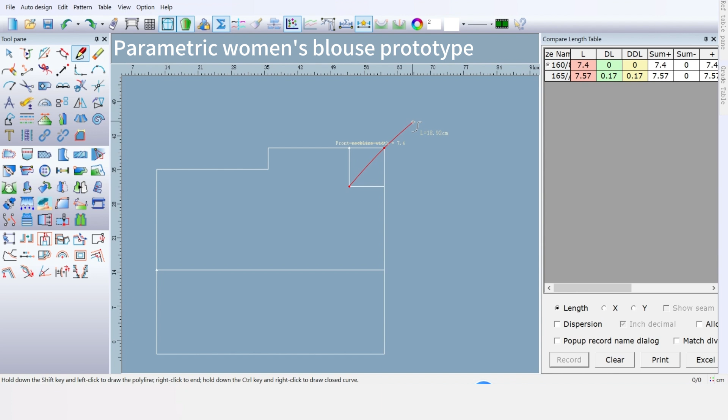Next, draw our front neckline arc. First, use the Intelligent Pen tool to connect two points. Then click the starting point. Then click any position on the lower half of the line. Select the proportion 1/3. Input the offset -0.5. Click OK. Then connect the endpoints and right-click.

Next, we locate the back neckline width position. Use the Intelligent Pen tool to click anywhere here. And input the length formula. Front neckline width plus 0.2. OK. Right-click to switch to the T-square tool. Draw downward, click anywhere. Input the formula, front neckline width plus 0.2 divided by 3. Click OK and connect the endpoints.

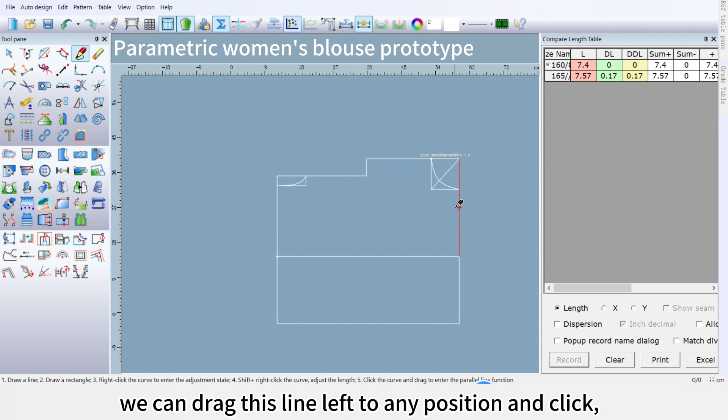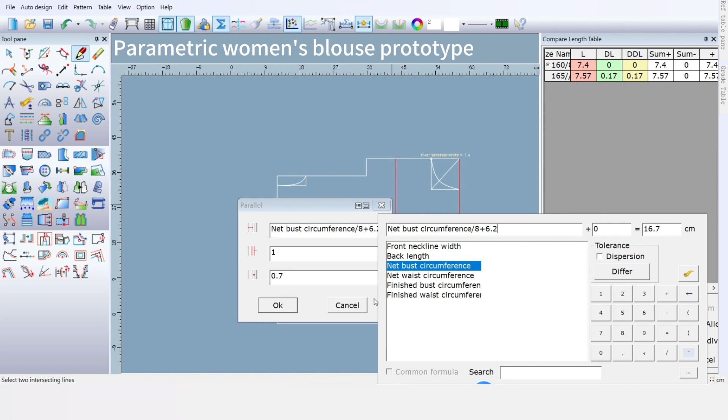Next, we locate the front and back shoulder width lines. We can drag this line left to any position and click. And enter our formula. Net bust divided by 8 plus 6.2. Okay.

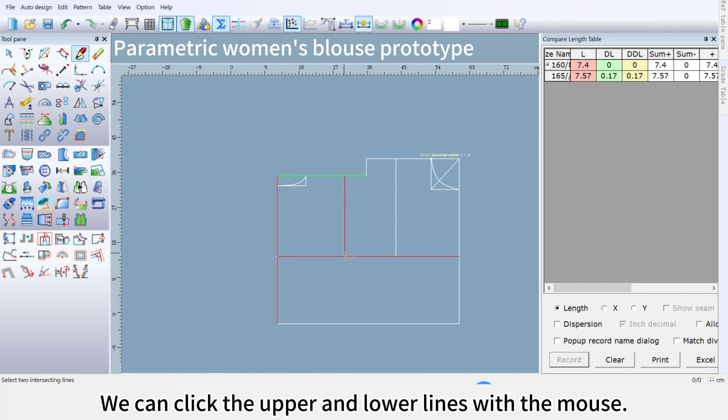Then draw the back shoulder width line and drag this line out. Now its length is too long. We can click the upper and lower lines with the mouse. When they turn green, we click anywhere. Enter our formula. Net bust divided by 8 plus 4.4. Click OK after finishing.

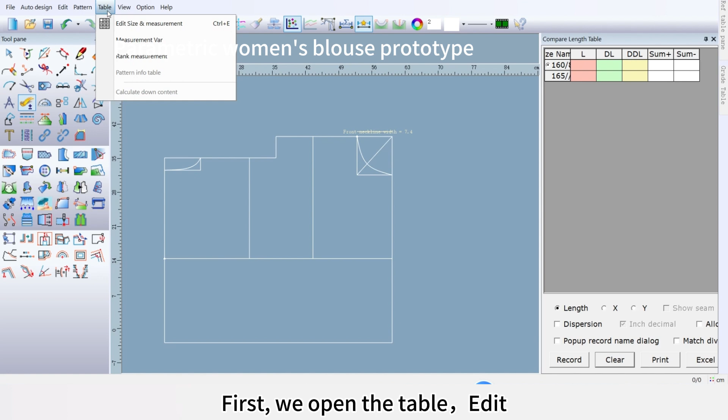Next, we draw the front and back shoulder slope lines. First, we open the table, Edit. Uncheck the length. Then input our front and back shoulder slope lengths.

Front shoulder slope 22 centimeters. Back shoulder slope 18 centimeters. Here we have two sizes, so we click the Intra-Group Size Difference button. OK.

Next, we use the Angle Line tool. Click the line and endpoint, drag out the line. Input the length 13 centimeters. Select the angle front shoulder slope angle. OK.

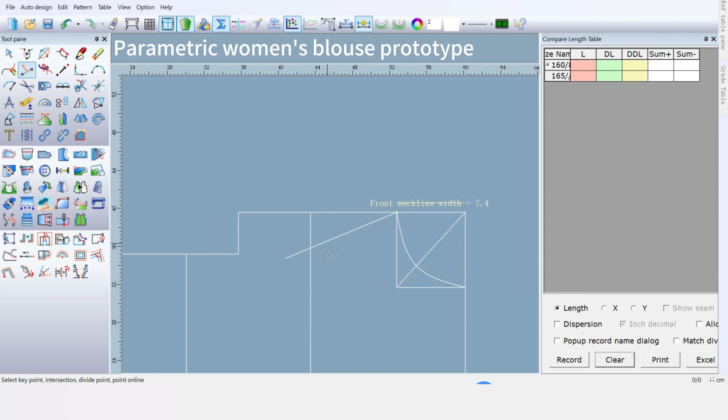Next, we use the point tool to click on the half segment line. Input its length 1.8 centimeters. Click OK. After that, use the Intelligent Pen tool to connect the endpoints. Right-click to switch to the T-square tool for connection.

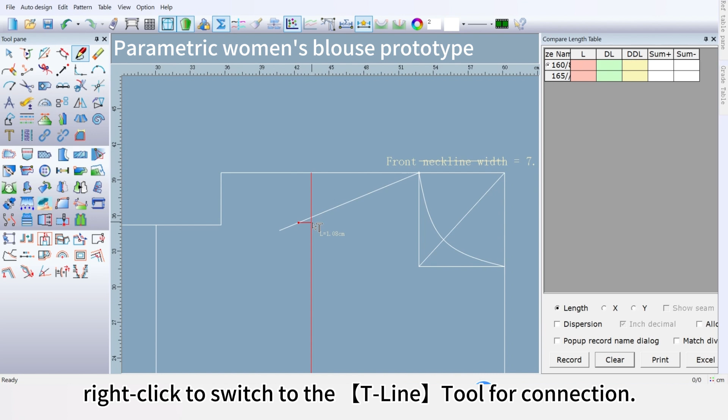Then use the Compare Length tool to connect the endpoint with the newly drawn point. Double-click it. After the segment turns green, click Record. Then we open the table, the measurement var. Change its name to Front Shoulder. Click OK.

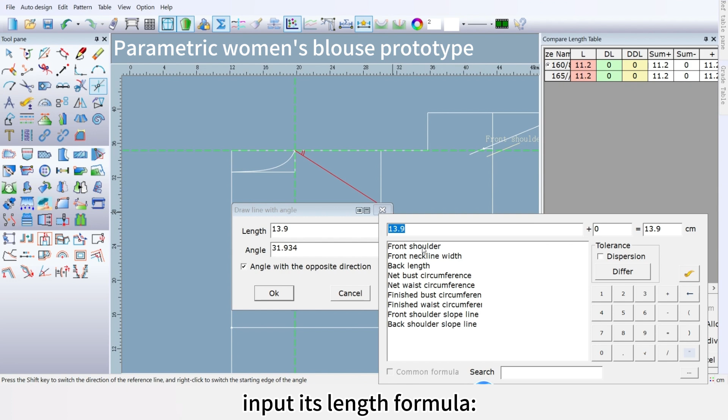Next, we draw the back shoulder slope line. Use the Angle Line tool to click the line and endpoint. Right-click to switch its angle. Then drag it out and click anywhere. Input its length formula: front shoulder plus net bust divided by 32 minus 1.2. Select the angle back shoulder slope line. OK.

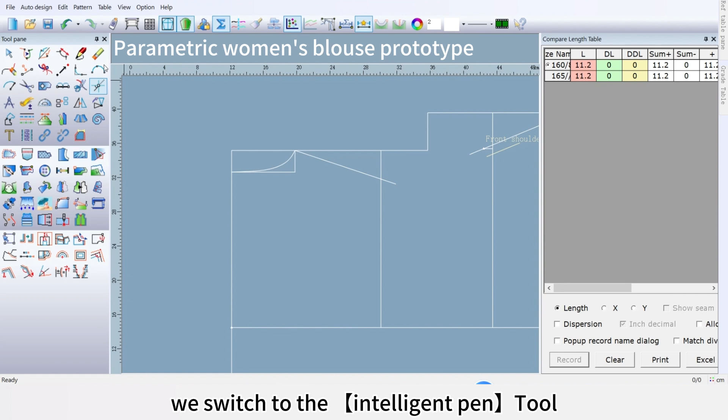We switch to the Intelligent Pen tool. Right-click this point to switch to a T-line. Connect it here. Next, we use the Point tool to locate 8 centimeters below this point. Now we can see our reference point is here. We can press the shortcut key F9 on the keyboard to switch the reference point position. Then click on this line. Enter our distance 8. OK.

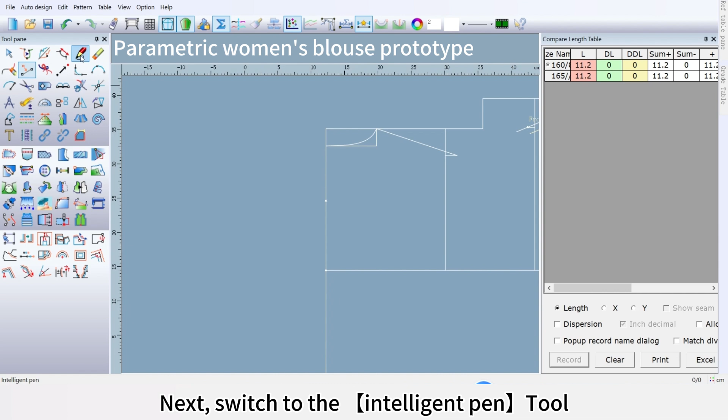Next, switch to the Intelligent Pen tool. Horizontally connect this point to the side. Right-click to switch to the T-square tool to complete the connection. Next, we use the divider tool to divide the segment into 2 equal parts. Here we can click the relative number on the keyboard. Here we can click the number 2. We continue to use the divider tool to bisect another segment. Click it.

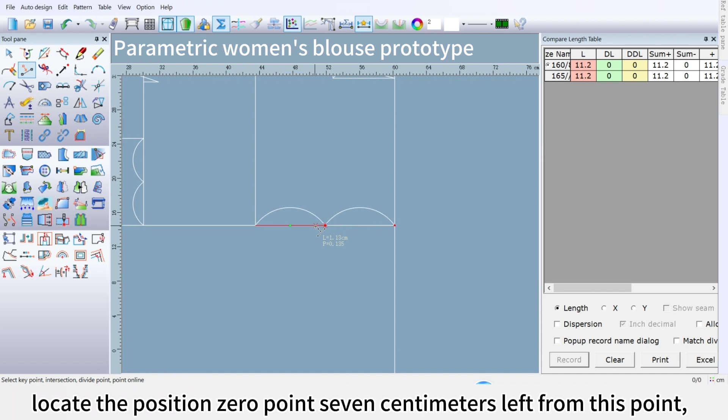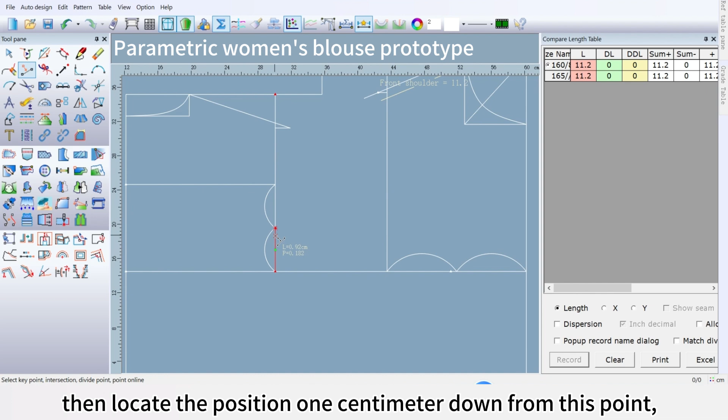Next, we switch to the point tool. Locate the position 0.7 centimeters left from this point. We first click the segment and input negative 0.7 centimeters. Click OK. Then locate the position 1 centimeter down from this point. Click the segment and input negative 1 centimeter. OK. Then we want to find the position of this point. We click it. Input the formula net bust divided by 32. OK.

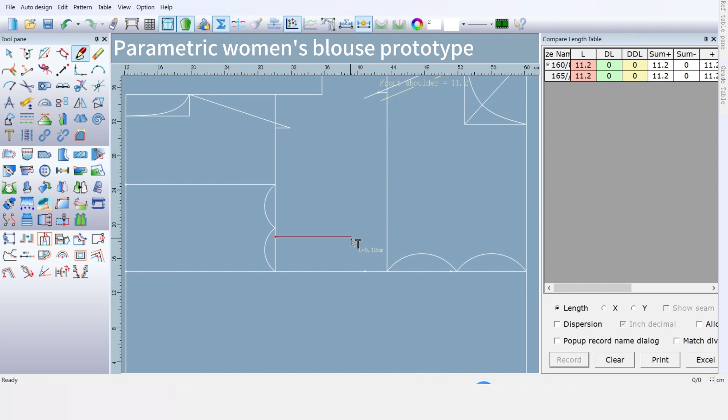Next, we use the Intelligent Pen tool. Draw a horizontal line from this point, and draw a vertical line from this point. Then select both lines. Right-click on the inside. Then connect the right angle vertex to the target point. Right-click the mouse.

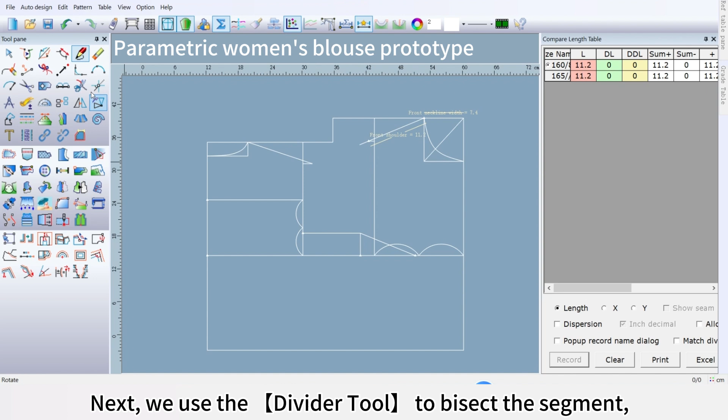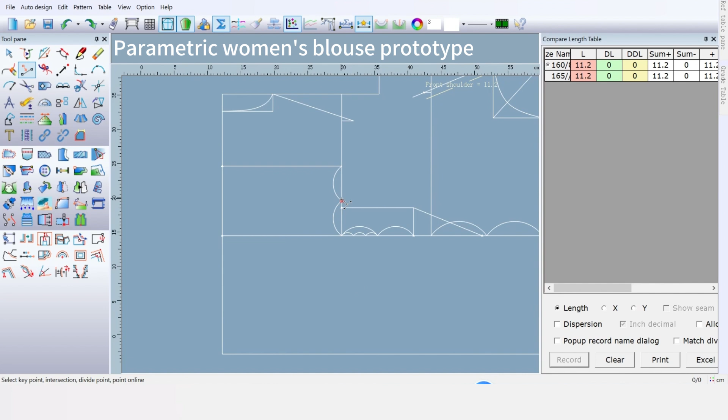Next, we use the divider tool to bisect the segment, and divide another segment into 3 equal parts. Click the number 3 on the keyboard and click it. Then we use the point tool to locate the position 1 centimeter left from this point. We put the point tool on this point and press Enter. Input the x-axis offset negative 1 centimeter. OK.

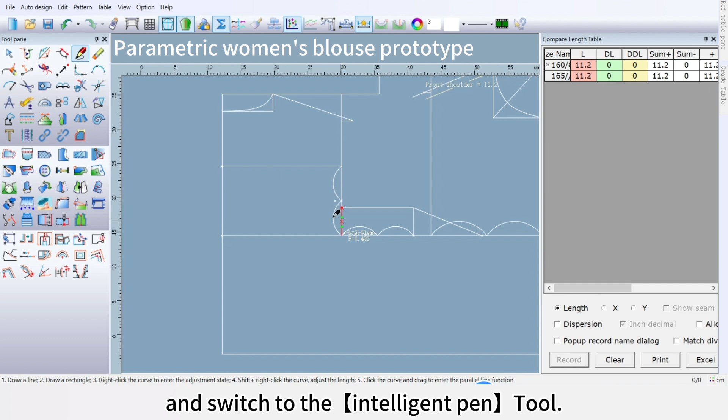Then right-click the blank area with the mouse and switch to the Intelligent Pen tool. Click this point. Right-click to switch to the T-square tool and connect it here. Connect the midpoint to the upper and lower endpoints. Connect this point downward.

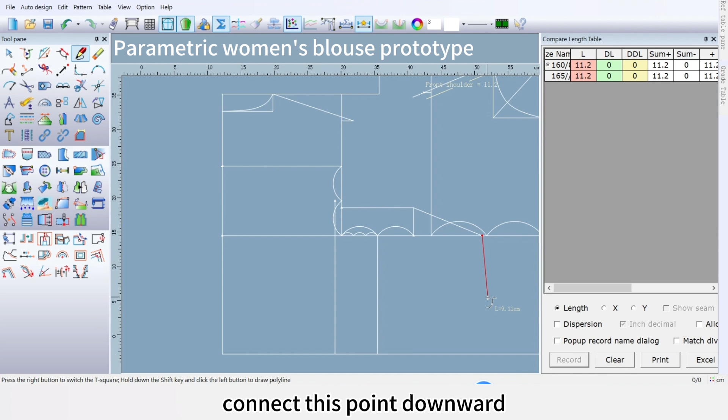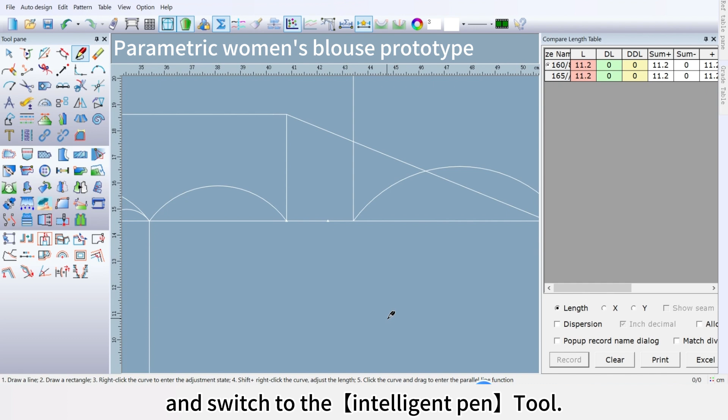Then we use the point tool to locate the position 1 centimeter left from this point. First, click anywhere on the line and input negative 1. Right-click the blank area and switch to the Intelligent Pen tool. Vertically connect this point downward and then upward.

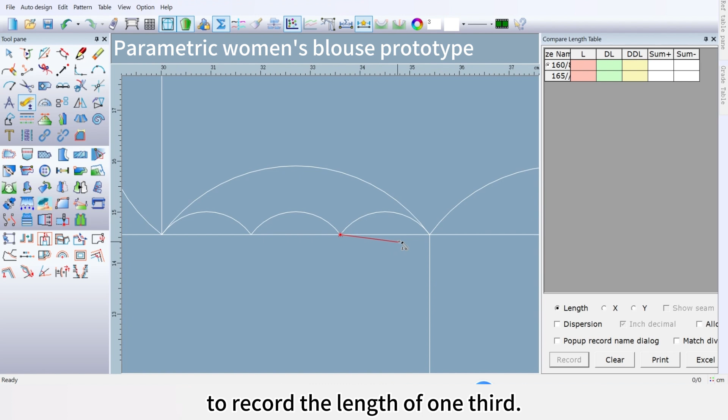Use the Compare Length tool to record the length of 1/3. Double-click it to turn green and click Record. In the table, the measurement var, change its name to Underarm Hollow Curve. OK.

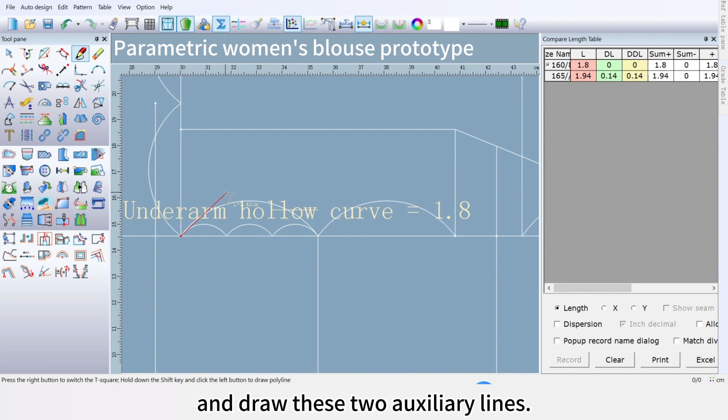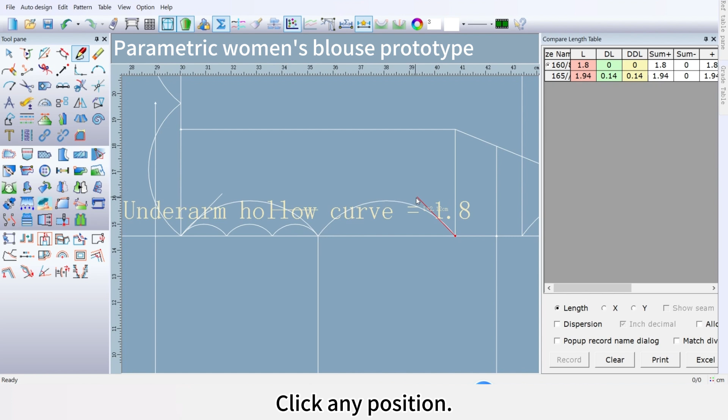Next, right-click to switch to the Intelligent Pen tool and draw these two auxiliary lines. Click this point. Right-click to switch to the T-square tool. Input the formula, underarm hollow curve plus 0.5 centimeters. OK. Click on this side as well. Right-click to switch to the T-square tool. Click any position. Underarm hollow curve plus 0.5 centimeters. OK.

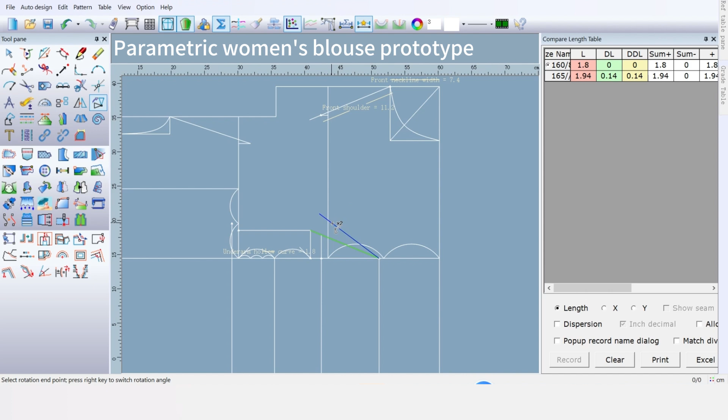Next, we use the Rotate tool. Click on this line. Right-click, click the center point, and select the line we want to rotate. After it turns green, we move the mouse. Click anywhere. Input our formula: finished bust size minus 4.5.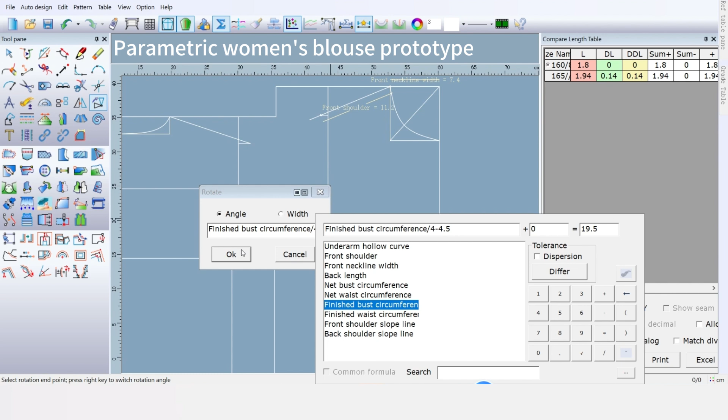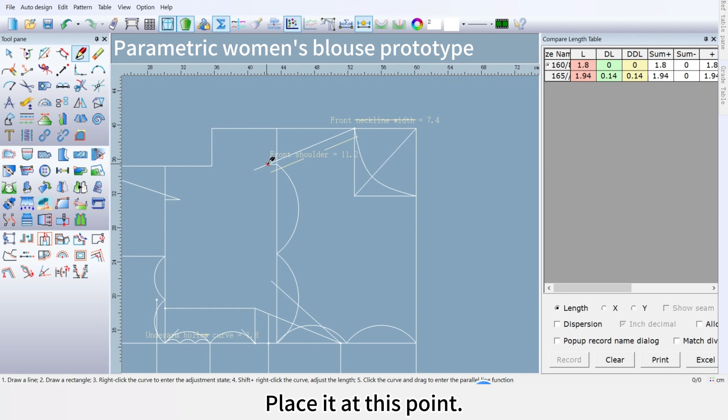OK. Next, we draw the armhole line. First, we use the divider tool. Drag from this point to that point to find its midpoint. Then use the Intelligent Pen tool. Place it at this point. Double-click Enter. Place it at the 1/2 point. Double-click Enter.

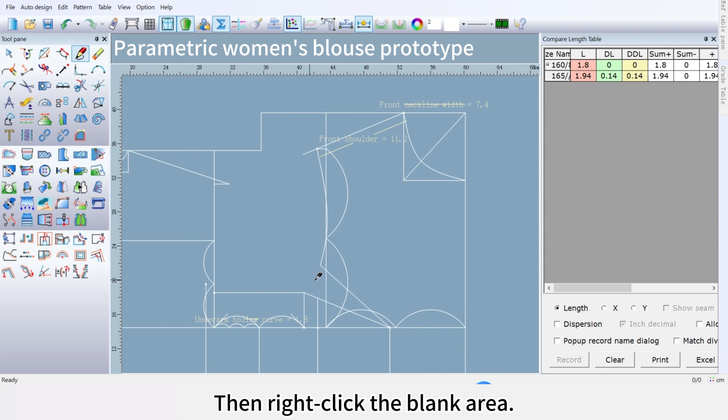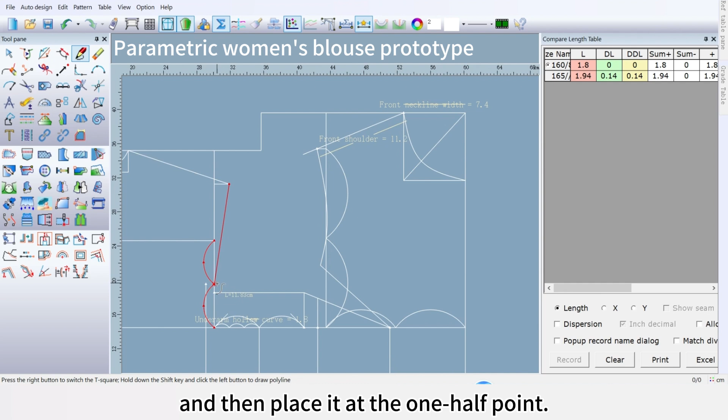And place it at this point. Double-click Enter. Then right-click the blank area. Then place the Intelligent Pen on this point. Double-click Enter. And then place it at the 1/2 point. Double-click Enter. Then place it at the auxiliary line position we just found. Double-click Enter.

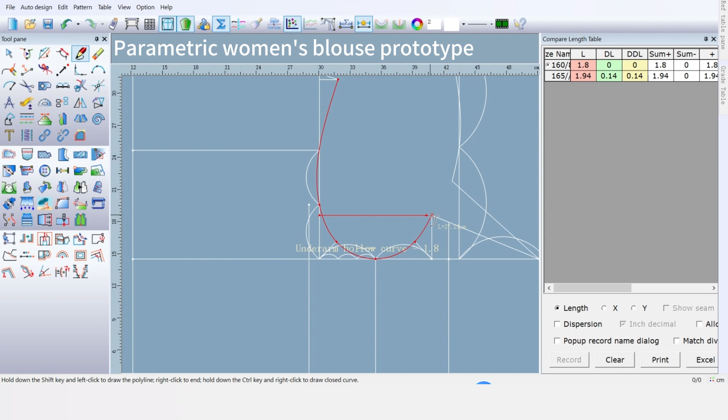Place it at this point again. Double-click Enter. And place it at this point. Double-click Enter. And place it at this point. Double-click Enter. Then right-click the blank area.

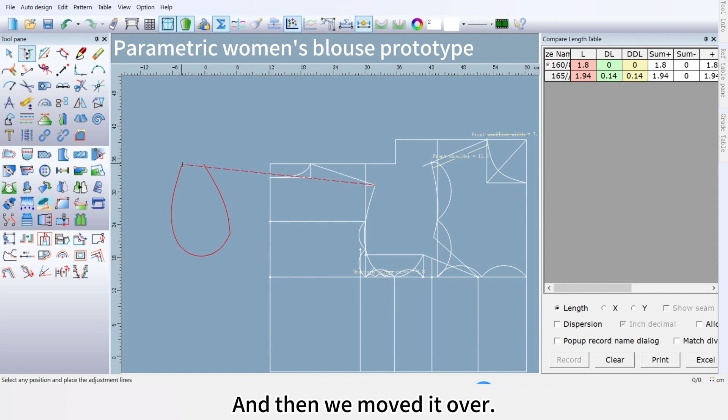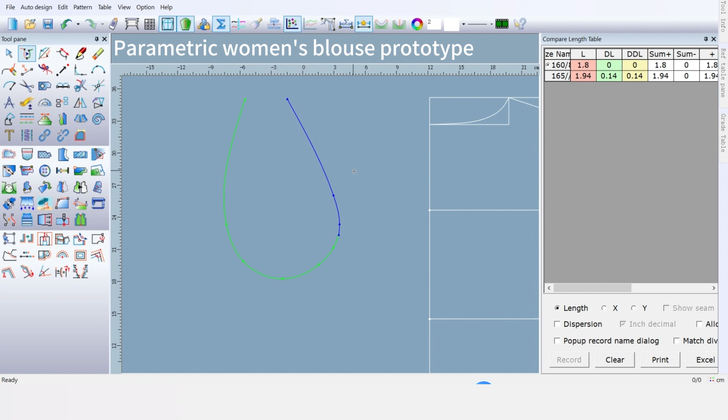Next, we use the Move and Rotate Adjust tool. Select the two arcs we just drew. Right-click the blank area and select these two lines. Right-click the blank area, and then we move it over. Click on the point on the line and adjust the arc. After adjustment, right-click the blank area.

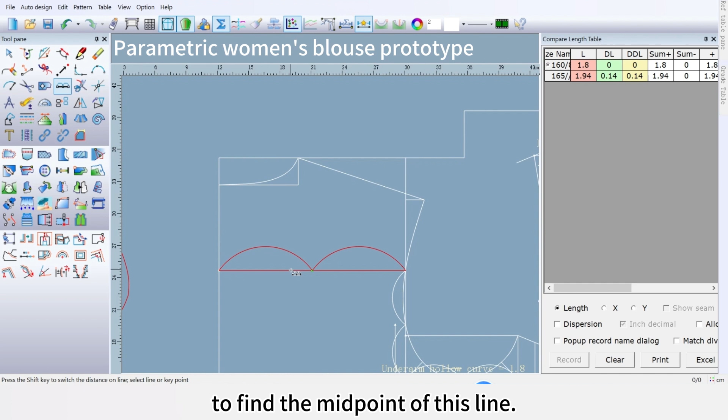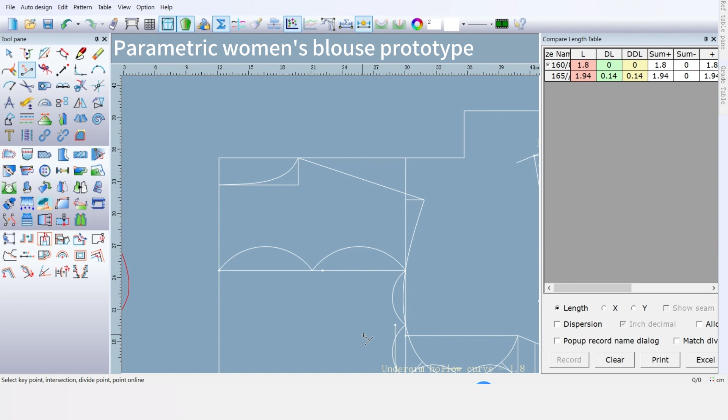Next, we draw the dart. We use the divider tool to find the midpoint of this line. Then use the point tool. Find the center point and offset it 1 centimeter to the right. Here we press the shortcut key F9 to switch the reference point and click it. Right-click the blank area. Switch to the Intelligent Pen tool. Connect vertically upward from this point.

Then use the point tool. Find this point and move it 1.5 units. We click and enter 1.5. And click the point we just found. And left-click anywhere on the line. Input the formula: net bust divided by 32 minus 1.2. OK.

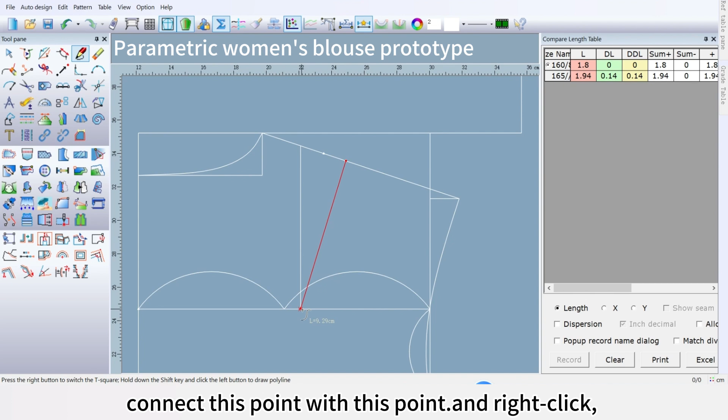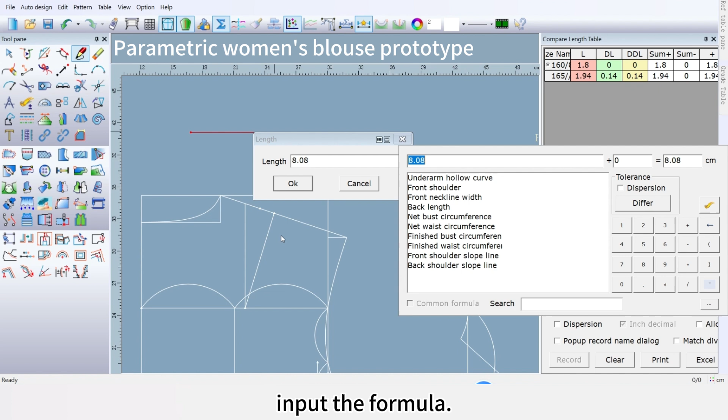Then we switch to the Intelligent Pen tool. Connect this point with this point and right-click. Then we vertically connect this midpoint with the lower part. Next, we draw a horizontal line in the blank area. Input the formula: finished bust minus finished waist divided by 2. OK.

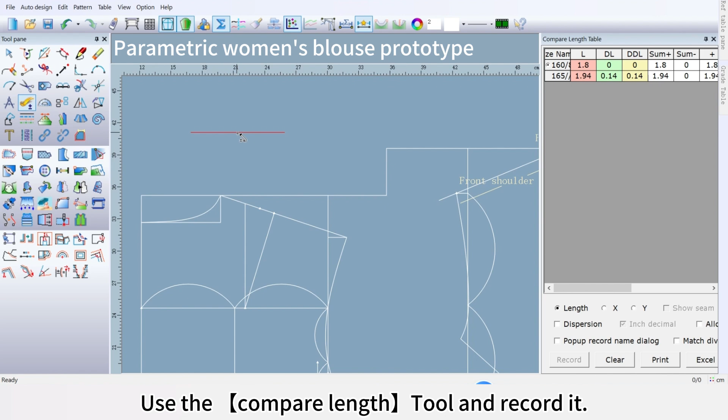Use the Compare Length tool and record it. Click it. It turns green, then click Record. Open the table, the measurement variables. Change its name: Bust to Waist Difference. OK.

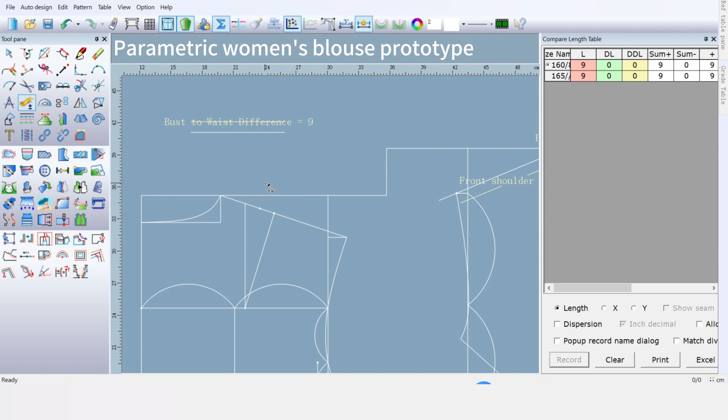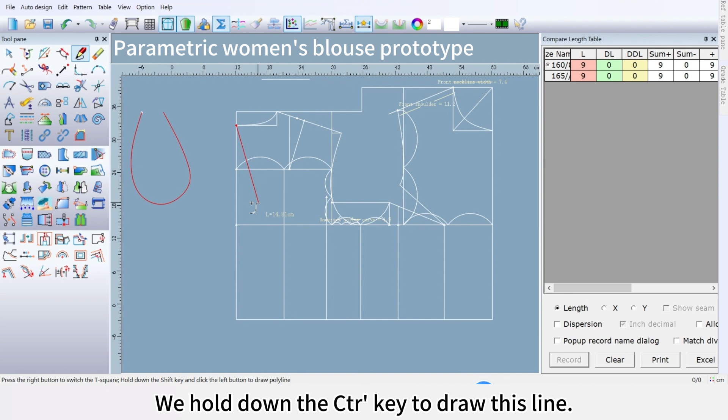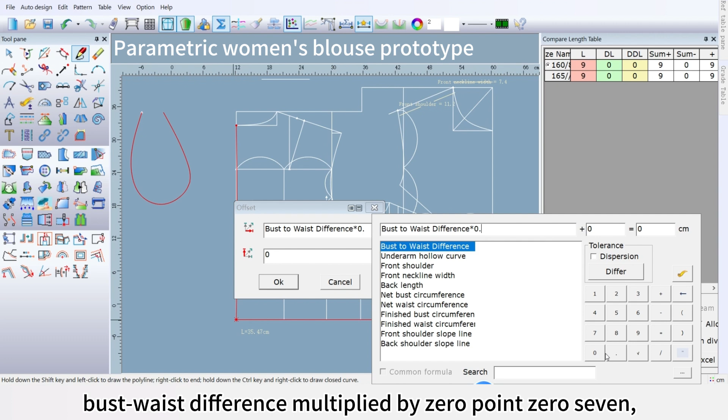Next we divide the bust-waist difference equally among the darts. Right-click the blank area and switch to the Intelligent Pen tool. First, draw this line. We hold down the Ctrl key to draw this line. Then put the mouse at this point. Press Enter. Input the formula: bust-waist difference multiplied by 0.07. OK. Right-click the blank area.

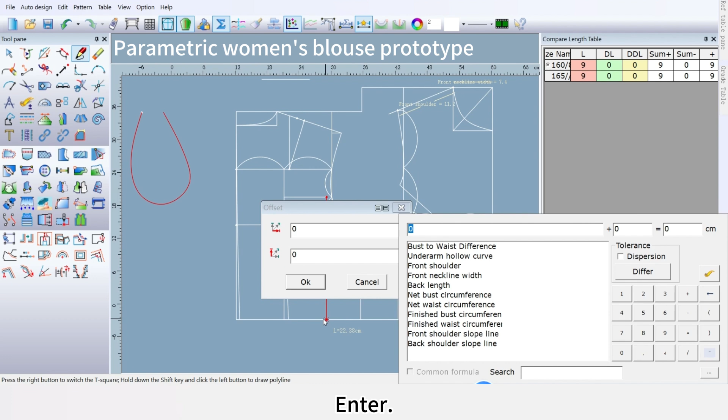And use the Intelligent Pen to connect it vertically here. Click from this point to that point. Press Enter. Bust-waist difference multiplied by 0.09. OK. Right-click, then from this point to that point, press Enter. Input the formula: bust-waist difference multiplied by 0.175. OK.

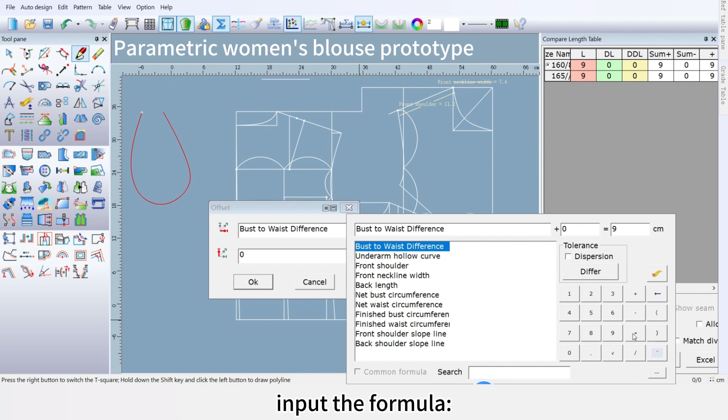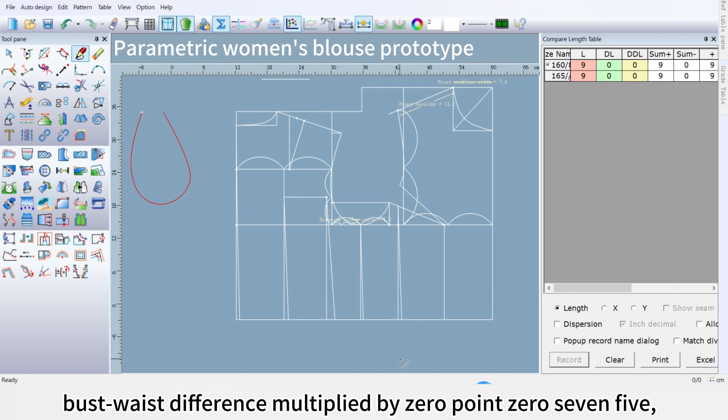Right-click, then click from this point to that point, press Enter. Input the formula: bust-waist difference multiplied by 0.055. OK. Then click from this point to here, press Enter. Input the formula: bust-waist difference multiplied by 0.075. OK. Then click from this point to that point, press Enter. Bust-waist difference multiplied by 0.07.

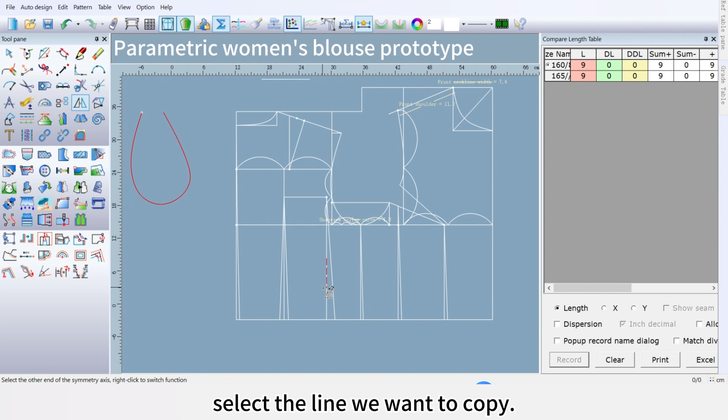OK. Right-click. Next, we use the mirror tool. Click the axis of symmetry. Select the line we want to copy. Right-click, click the axis of symmetry, and select the line we want to copy. Repeat this for each dart. Thus, our darts are completed.

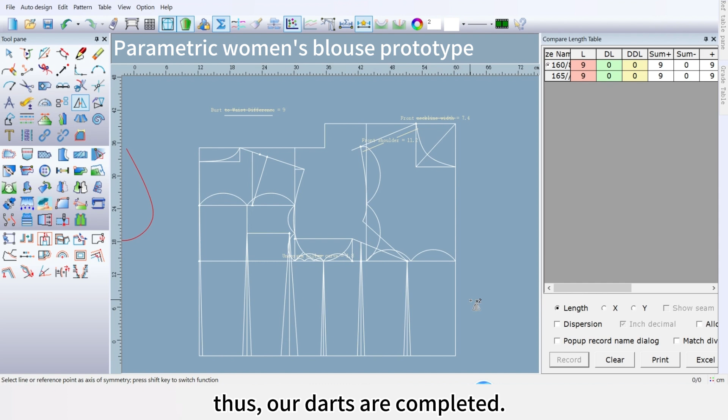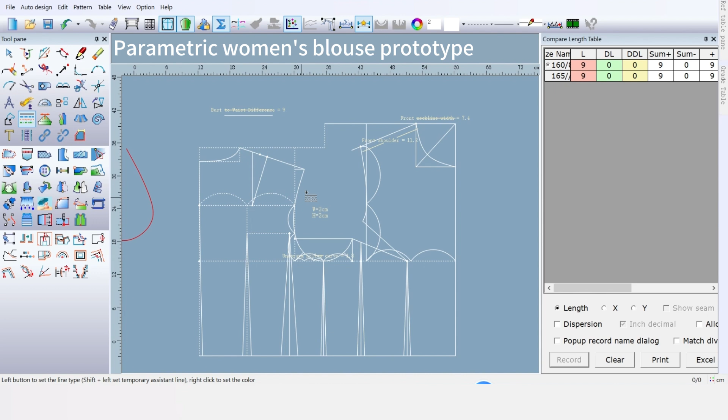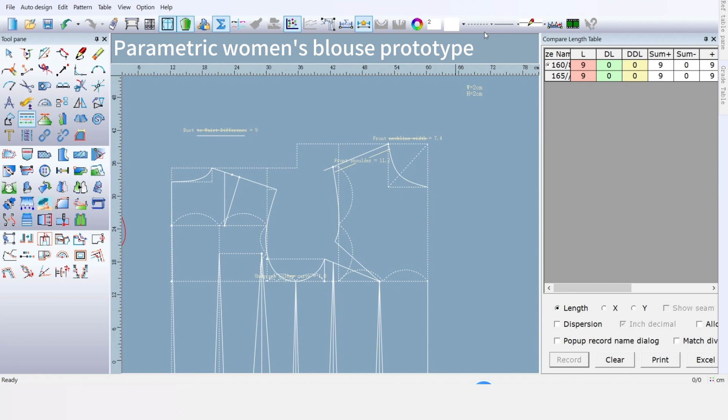Next, we use the Set Line Type tool. Switch our lines to dashed lines. Then click our auxiliary lines. Then switch our lines to thick lines. Select our structure lines.

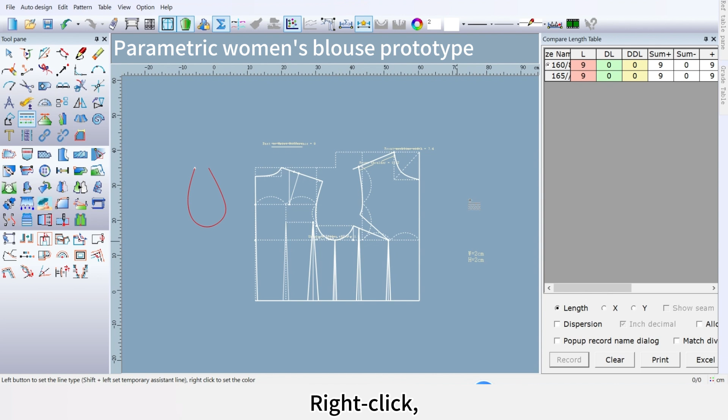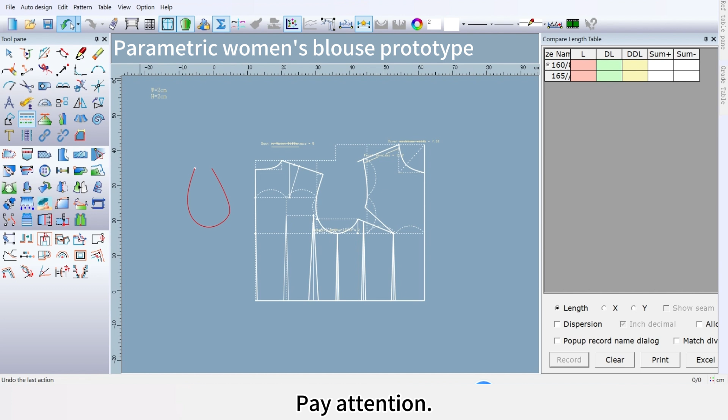Right-click. Thus, our parametric women's blouse prototype is completed. Next, we switch the size to see the effect. Open the table edit. We can manually change its size. OK. Then click OK. Pay attention that all our structure lines have changed with the size variation.

So today, our parametric drafting and demonstration of the women's blouse prototype ends here.